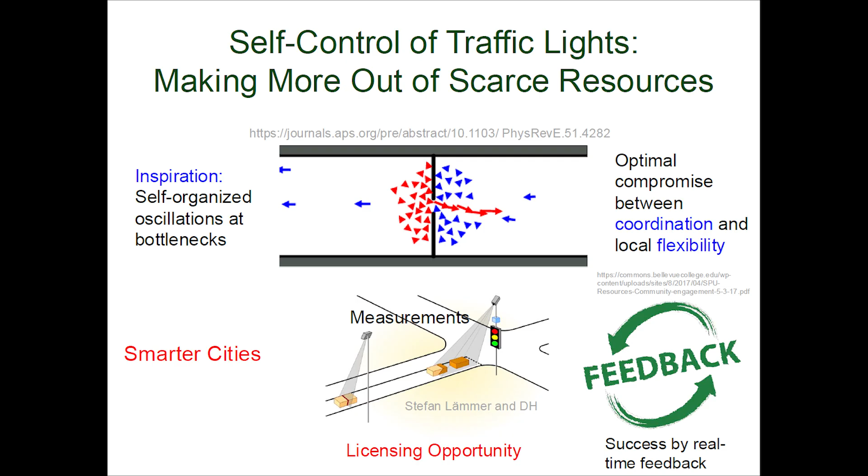What we've done is we have compared at least 3 principles of traffic light control. One based on a central control center, which basically tries to collect as much data as possible and to come up with an optimal plan, like a benevolent dictator. But it turns out that traffic light optimization is an NP-hard control problem, and basically in reasonably sized cities, even supercomputers cannot do it perfectly. So you need to make simplifications.

And therefore we have tried out decentralized approaches, where the traffic lights respond to the traffic flow just in the neighboring street sections. And that implies that every intersection is trying to do the best job it can do, but there's no coordination between neighboring intersections. And the third approach, which we call other-regarding coordination, is actually paying attention to the neighboring intersection. Not more than that, but this enables coordination between the intersections and the traffic flows over there.

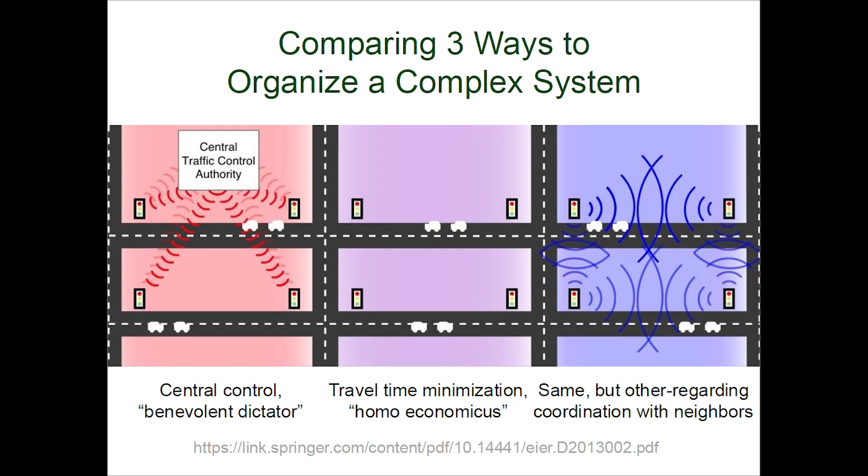And this sounds unbelievable, and so we put it to the test. In particular, we did that in Dresden, where I was professor for some time. And you can see the area of the city that was concerned. It's in the center of Dresden. And in fact, it's the most complicated area.

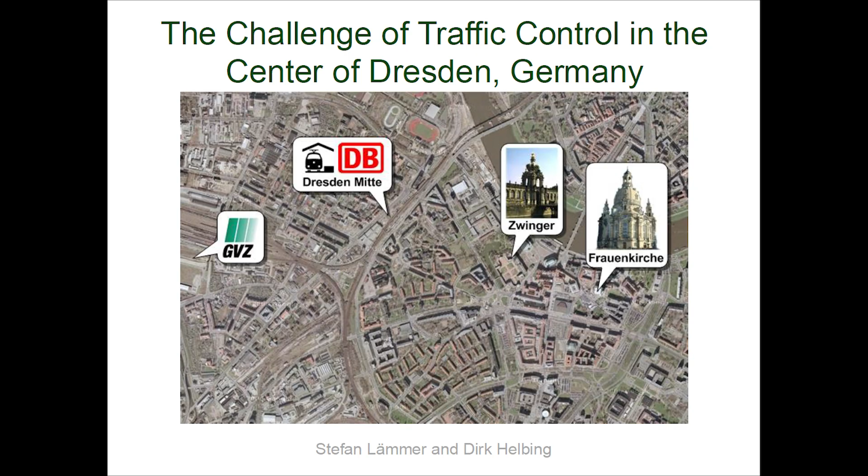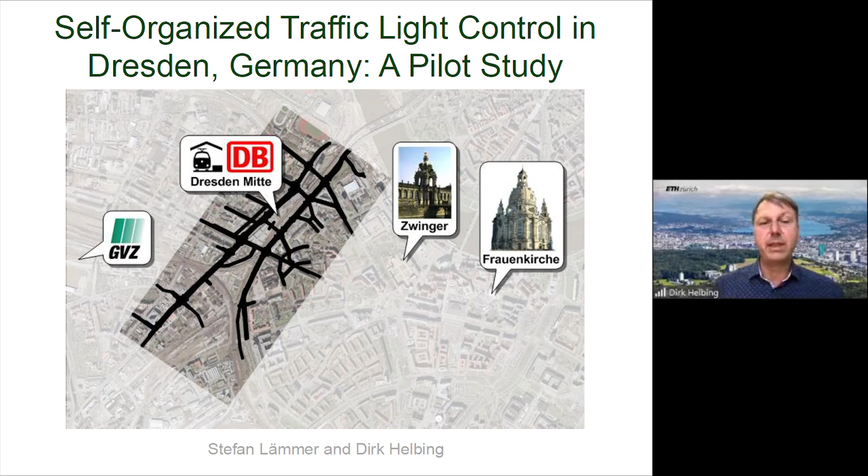Of course, they have been buying the most advanced state-of-the-art software to control the traffic flow. This software produces green waves and it's also adaptive, but they couldn't prioritize public transportation, which they wanted to do. But if they did that, basically this interrupted the green waves and it destroyed the flow in such a way that a monster traffic jam would come up quickly and it would stay there for hours.

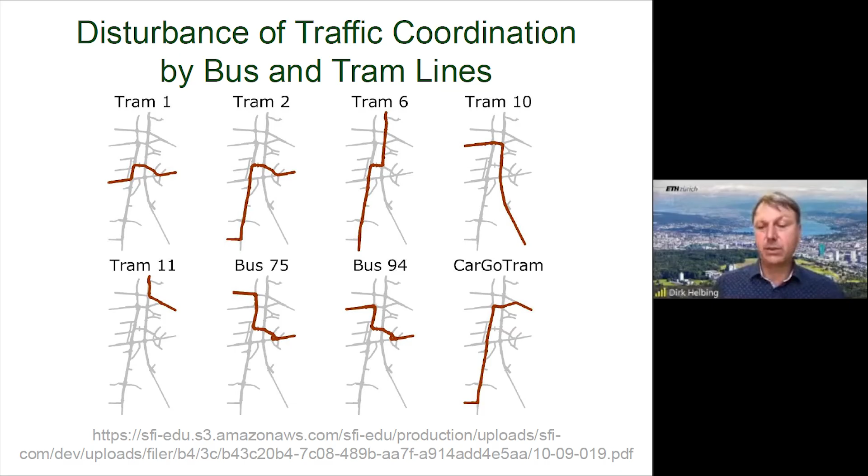We've been able to come up with a better approach, which is benefiting not only cars, but also benefiting public transportation, pedestrians and cyclists, and also the environment. That means nature is benefiting too.

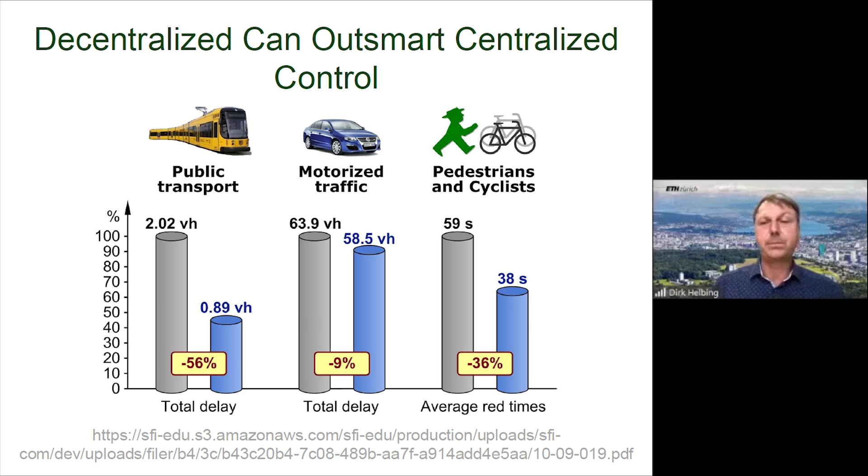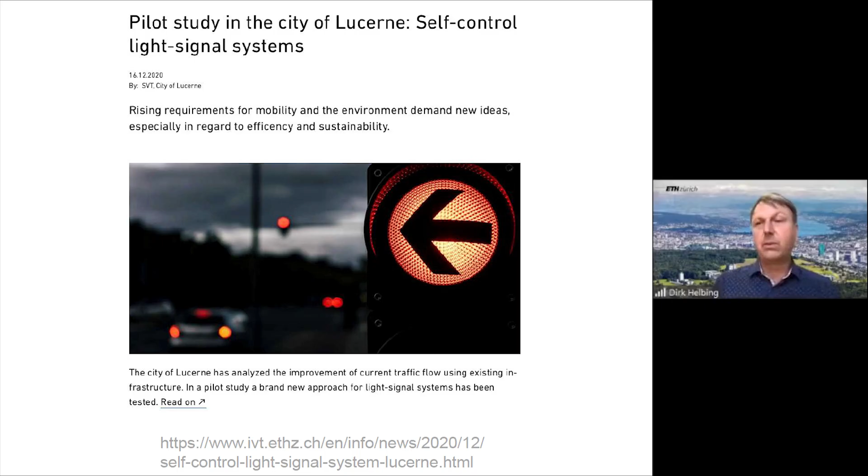And this has actually been evaluated independently, and I would say even secretly, by another institute. And it came to really very strong results. It showed that this approach is much better than what was available before.

We are now talking about another city, a city in Switzerland called Lucerne. And there were newspaper reports about it. So they say, thanks to the super traffic light, everyone needs to wait for a shorter time period. More green for everyone. And here you can actually see the effectiveness of this approach.

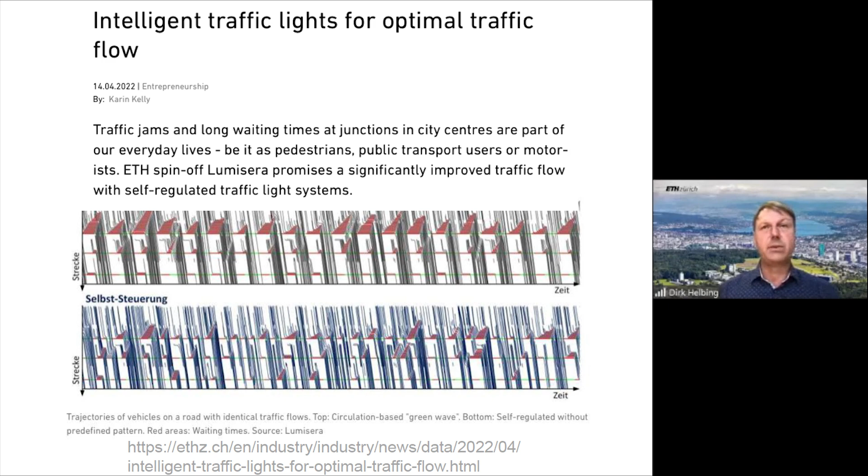So on top you see a lot of red, which corresponds to the traffic jams forming behind the red lights. On the bottom is what you get with the self-control approach. That means a lot less waiting of cars. And so protecting our environment can actually benefit everyone if we just do it the right way.

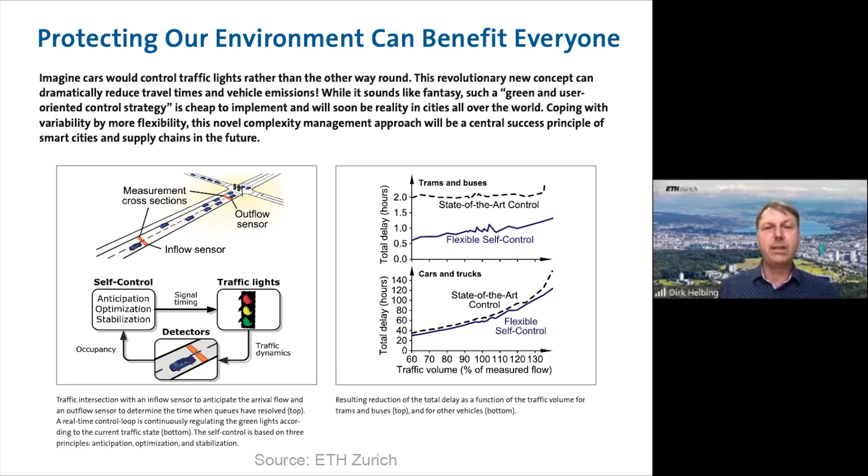There's actually a patent for this, which can be licensed also in India. And the very same principles can in principle also be applied to logistics and supply networks to make them more effective. Because many of the problems in supply networks and logistics are very similar to the traffic jams that we've been talking about before.

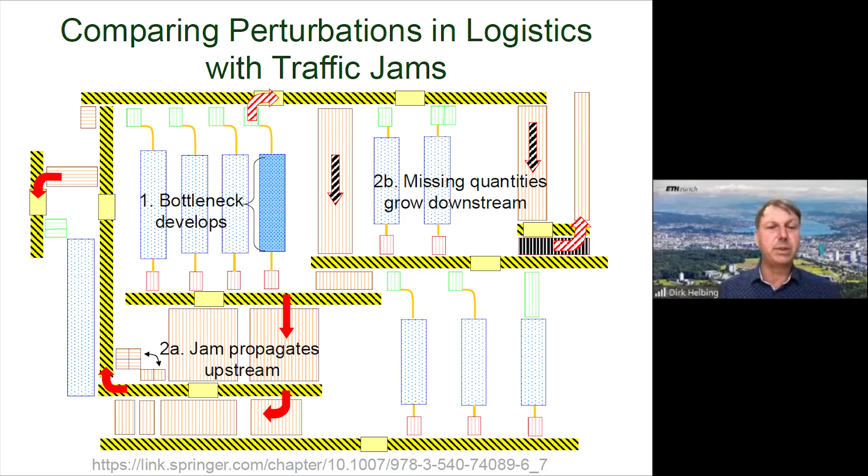Actually, we have been working together with Infineon, which is a wafer production company that you probably know. And we have found that there was a slower-is-faster effect. That means we came up with a new way of scheduling the process that made the production process more than 30% more efficient, something that was almost unbelievable.

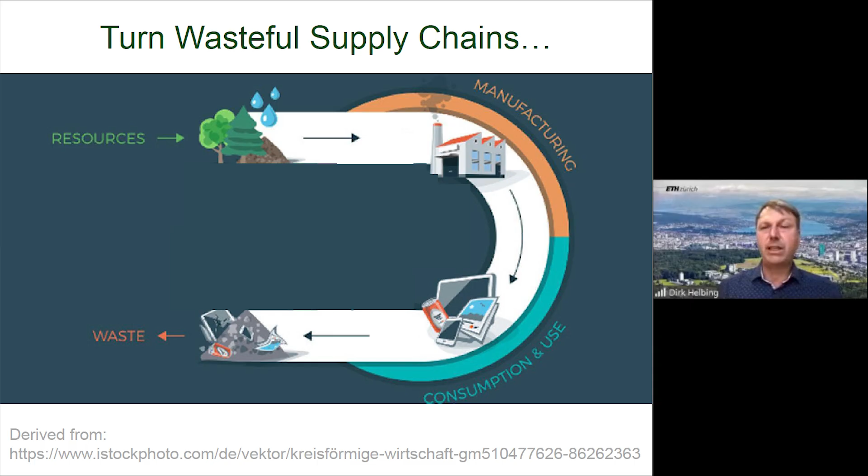And so basically we want to apply that also to make the world more sustainable, actually with a new socio-ecological finance system that we call Fin4. And so everyone knows that we need to turn wasteful supply chains into a circular economy. The question is just how.

And here basically the Internet of Things comes to our rescue if we would just use it in a participatory way. So the idea is to again get real-time data and create real-time feedback. So to map collectively in a participatory way noise, CO2, emissions, poisons, and all other externalities, also good things, and then basically create a feedback. We've done that also for air quality. The feedback should make sure that positive externalities are increased, negative ones are reduced, and fair compensation is ensured.

And so basically this approach is combining all sorts of measurement methods with new kinds of money, actually not just one kind, but many kinds. So it's a multi-dimensional feedback and incentivation approach that would introduce new forces into the markets and into the economy that would little by little lead to improvement of the production processes and logistics, such that eventually by a co-creation process and a co-evolution process we would get towards a circular economy.

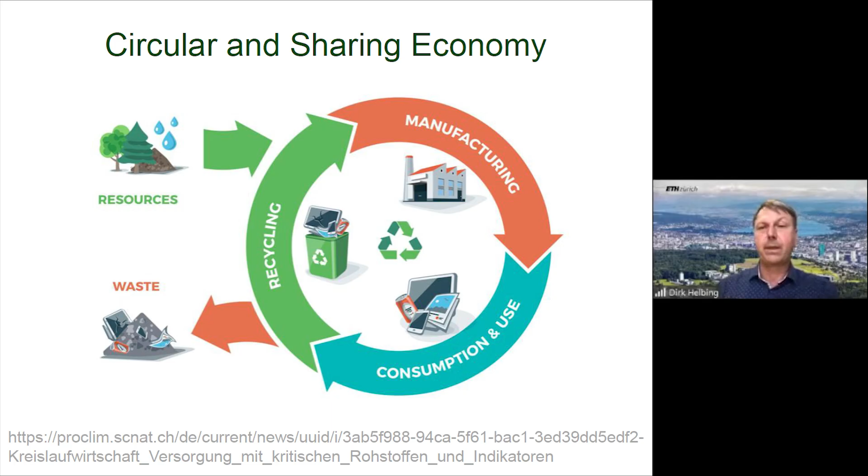So in summary, we need solutions that acknowledge and embrace the complexity of systems. We cannot control everything top-down, and particularly not complex systems that are made up of heterogeneous elements, behave differently, there's a large degree of fluctuations, short-term predictability, actually all properties that apply to a lot of systems around the world today. These are the problems to be addressed, and actually I've just shown you a revolutionary new approach that allows to make a much better job than we've been able to do in the past.

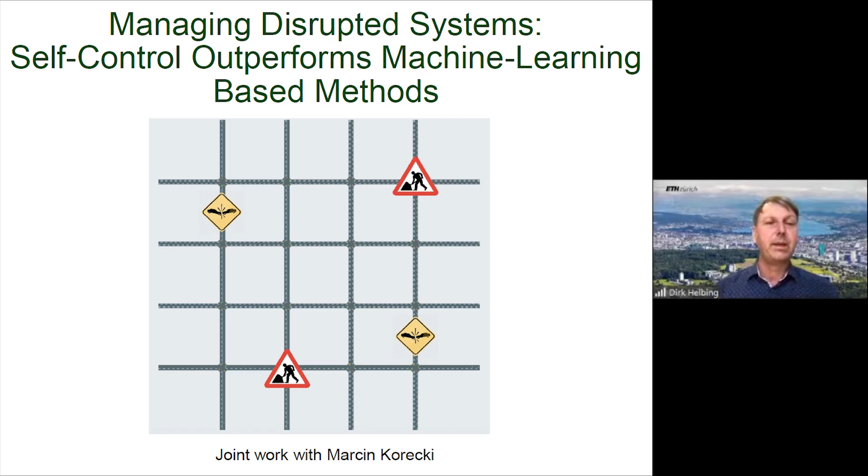It turns out also that if we compare that with machine learning approaches and AI approaches, this approach actually outperforms. So that is something that Marcin Korecki will be talking about in a minute. He is the superstar who is actually trained in machine learning and AI and figured out that things can be done much better in complex interactive systems such as traffic systems that are creating a hell of a mess and a lot of congestion and bad air quality and poor quality of life today.

But all of that can be changed, and we're also now working on an approach that would allow to satisfy multiple goals, such as short travel times, little congestion, better air quality, better environmental conditions.

Without further ado, I'm handing over to Marcin.